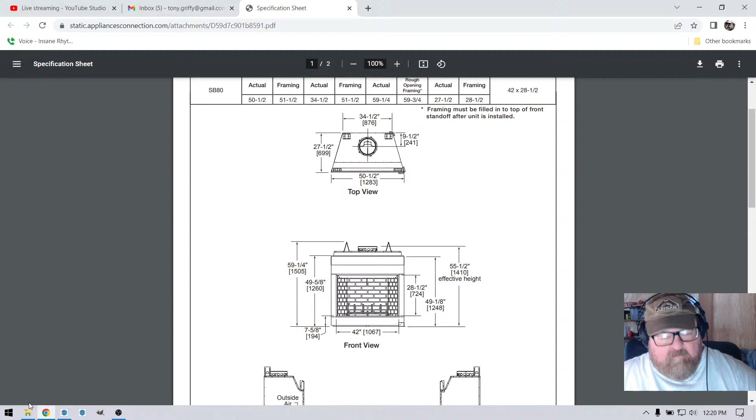I gotta build this fireplace. Actually, we're going to assemble it, but I need to figure out the chimney parts first, the flue pipe parts. This one's not as easy as you might think. I mean, it's pretty simple, but since I was messing around here, I thought I'd show you how I might do this.

I know that we framed this 8 feet out to out. Is that 4.5? So really that'll work.

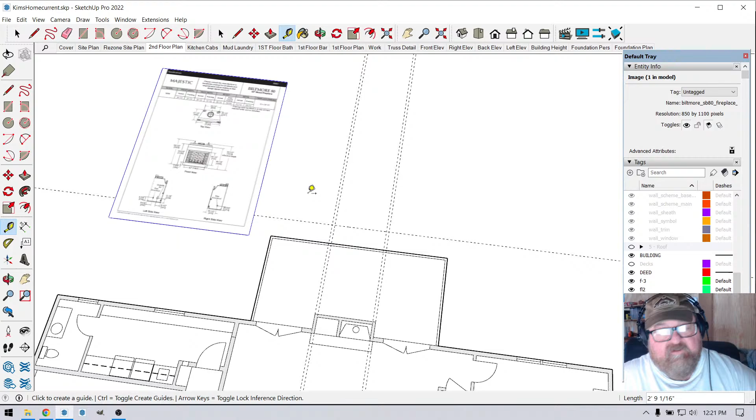So what I thought I'd do is draw this in 2 dimensions first, just up here to start out with. Just draw the floor line across here, and then draw this in 2D first, so if I run out of time, at least I know what parts I need. So I'm going to draw this basic outline here. Now let me get my stud wall in.

I know this wall is 14 feet tall. So I'm just going to draw it like this, kind of diagrammatically for now. And that's 8 feet out to out.

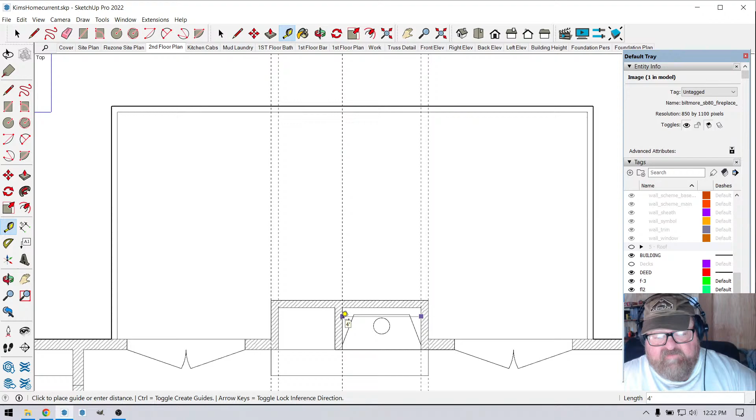So the reason this isn't complicated but the fireplace is actually going to sit straight down here on this side, and then we're going to have a wood box over here. But when I did the floor plan, I was guessing kind of from history. I allowed 4 feet in here, but it's only 42 inches, which is actually more common.

So I'm trying to get my monitor straightened up here. I bumped it. Does that mess up my camera?

Nope, good. Alright, so this wood box, let's just draw the box itself, is 49 5/8 by 50.5. So 49 5/8. What did I do?

I've got my keyboard kind of down here underneath my laptop because I have a bigger monitor. Sometimes I have to reach under and figure things out.

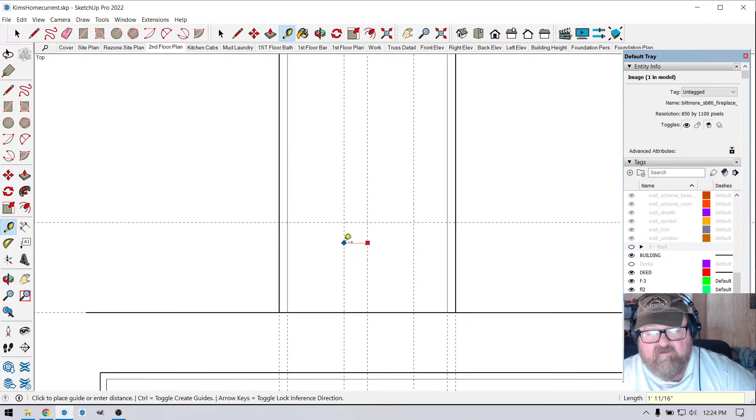So that would be 49 5/8 and then 50.5. So let's just draw this over here for a second. So that would be 25 1/4, 25.25. That's our basic box.

Actually, I want to make this a group because is that going to mess up my? No, good, it copied it. Okay, so just to kind of make it look like a fireplace for now, I know that he told me that...

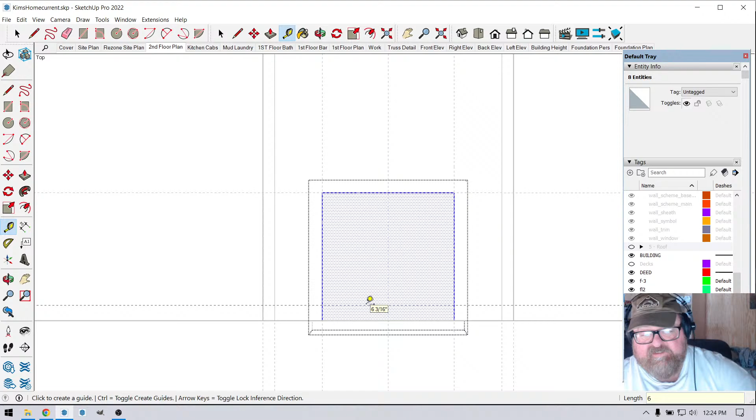It's 6 inches down here. Let me go edit this group. There we go. Just to kind of show the firebox, it's 6 inches, and then it's 28.5. I can see 28.5, and he said it was about 13 inches left over.

That's 15. So that's the part that you can see. 13, she said it was 13. Yeah, that makes sense.

And then there's 4 inches on each side of metal, so the actual viewing area of the firebox is like that. Okay, so that just gives you an idea of that.

And then what we can do is draw this pipe. What I have to do, and this is why I made this a group, is move this fireplace over to this side, and let me get rid of some of these guidelines. So the fireplace has got to go over on this side, and then obviously we'll frame in.

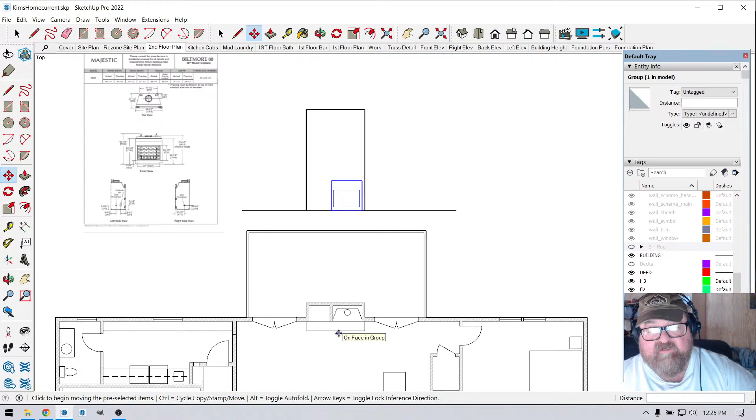But what I need to do is take the chimney out the middle, right? So if I go to the middle of this, I got to get over to there. And it's funny, it's not as much as I thought it was going to be. He gave me all the dimensions of the pipe, so we shall see.

But I want to get this a little accurate, because 55.5 is to the top of that sleeve coming out. I don't like having random pieces sticking out up here. I've seen people who literally miscalculate the height and their cap is sticking way up here. And I've already got this part of the chimney at the 2 foot, 10 foot rule.

So I only have to come up high enough to get the cap on, maybe 6 or 12 inches of pipe, and then the cap. But I don't want to go putting a bunch of pipe sticking up, it's going to look nasty. Besides that, we're going to have a chimney cap that goes over the top of it.

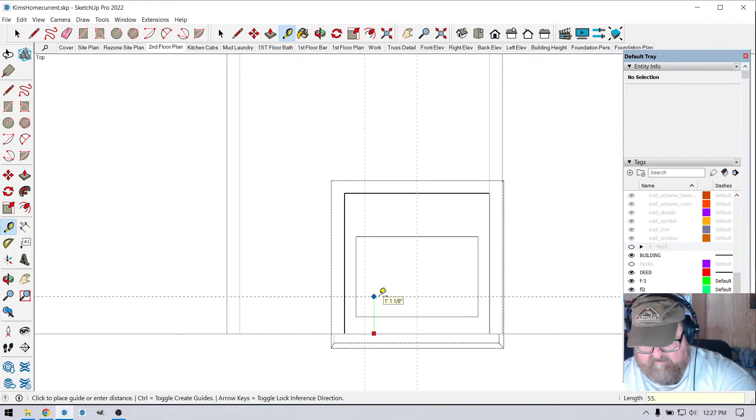So it's 55.5. 5.5. And why does that look weird? 49 5/8. Something that's not right.

59.25. So it has these little ears. These little triangular things are metal, and that's where your header goes. The header of your fireplace will go there.

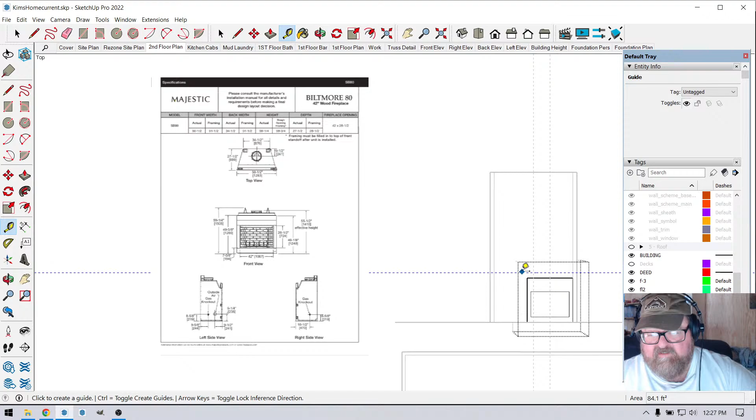And why is that doing that? That's weird. Why is that not snapping to that? The header of your fireplace will go right here, and that's on a different plane. That's weird. Anyway, don't want to get sidetracked here.

And I know that pipe is 13 inches. So if I have a line in the middle and I go 6.5, 6.5, that looks like it's sticking up too far to me, because I've put in a bunch of these, and I think this is just a matter of it doesn't actually stick up that far.

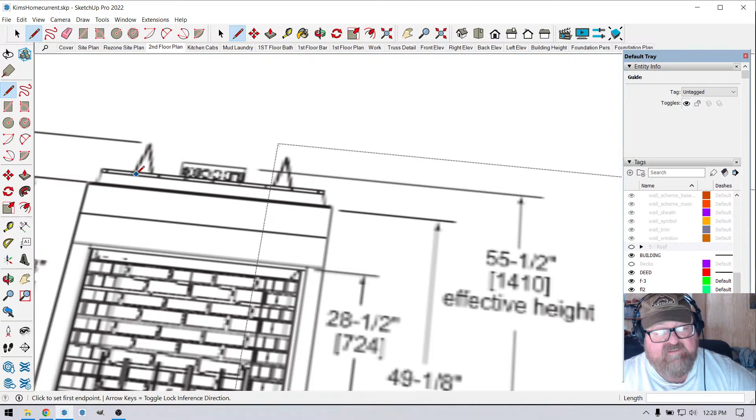There's some other metal that comes up here. See this stuff right here? There's like a guard or something, or a flange around it. This is back though, it's not on the face of this. The only thing that's out on the face is this outer perimeter border, and that's what you see. The rest of it's all behind the wall.

So this is probably sticking up maybe 3 inches. Yeah, so this probably does something like this. Let's just line it up with something. It probably... we'll line it up with that. That'll look good. It probably does something like this.

Something like that, yeah. That's more what I'm used to. I'm used to it sticking up out of there about 3 to 4 inches. Yeah, 2 15/16. I was close.

And so let's get rid of some of these guidelines. Drives me nuts when they get to be too many. Now what we can do is start to figure out our pipe.

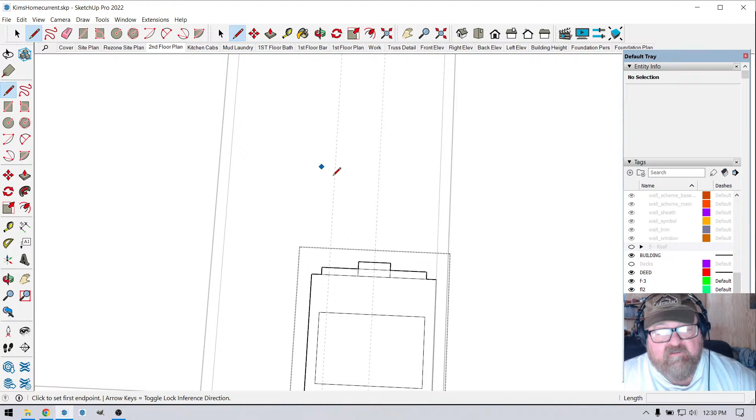Okay, so the pipe comes in 6, 12, 18, 36, and 48. So what I'm going to do is start off thinking I can do a 12-inch piece, because I don't like the 6-inch pieces.

Right, so now I got to do... what I think I'm going to do is do the pipe in their own groups. And the reason I'm going to do that is because I want to be able to draw them. I'm going to draw them three-dimensionally eventually.

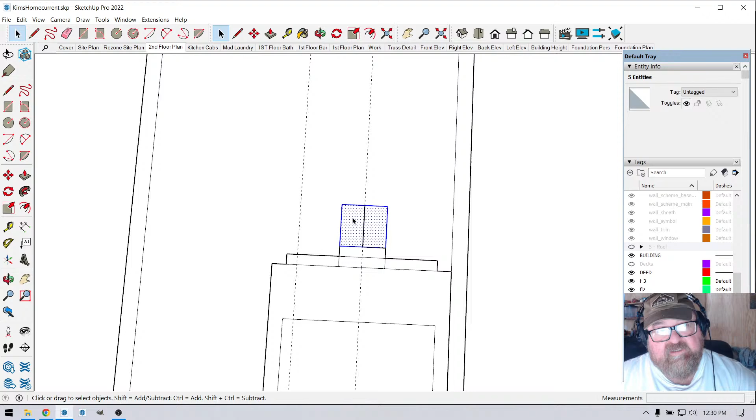So I'm going to make that a group. Okay, so that's its own little pipe. Okay. I should have left it alone.

So now this is the transition piece, or it's 6 3/4. I had them measure this for me. They're like, what's wrong with you, ArtisanTony? 6.75.

Up, and then it goes at 30 degrees. Let's see, got a little compass here, our protractor, 30, and that's got to go to... well, let's see, yeah, then it's 13 inches. Is it 13 inches? Yeah, 13 inches this way.

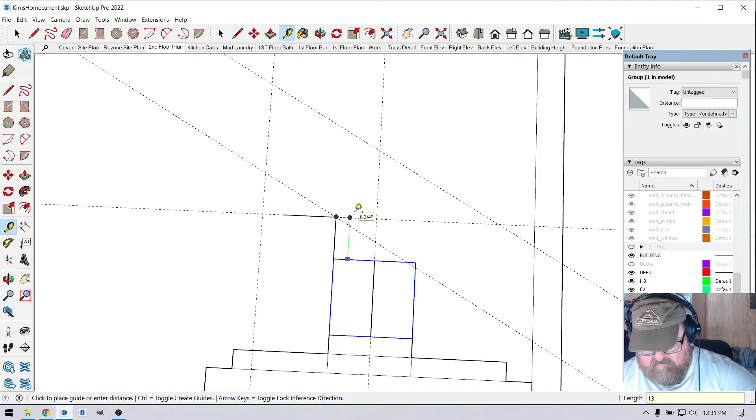And then she said it was overall 13 3/4. Which doesn't... oh well, okay, so if that was the overall height...

I don't know. I'm just going to draw it like this for now. And is that 13 inches? That's 13, and this is 13.

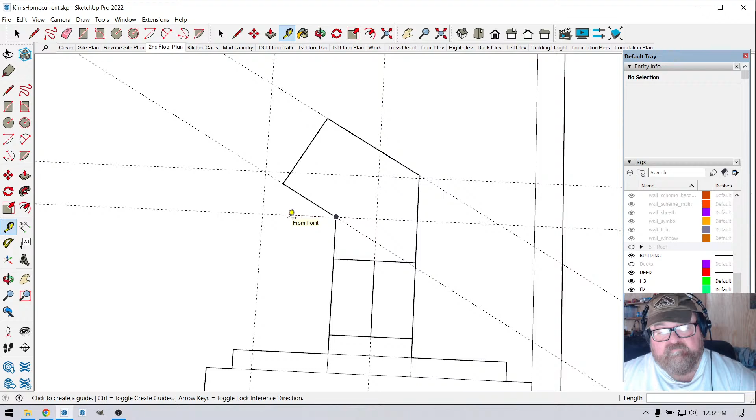I don't know how this can be 6 3/4 and then this only be 13 inches overall. This is why I was asking them.

Well, I guess what it means is technically this part would have to come all the way back. See, that doesn't make any sense. Doesn't make any sense.

I mean, even if it was right there, I don't think she knew what I was asking her when I was asking her what's the overall height. I'm getting like 18 inches. If this is 6 3/4...

So, oops, I messed that up, didn't I? I don't think it... I think it's going to be more like, from what I remember, just from installing these things, this is more like that.

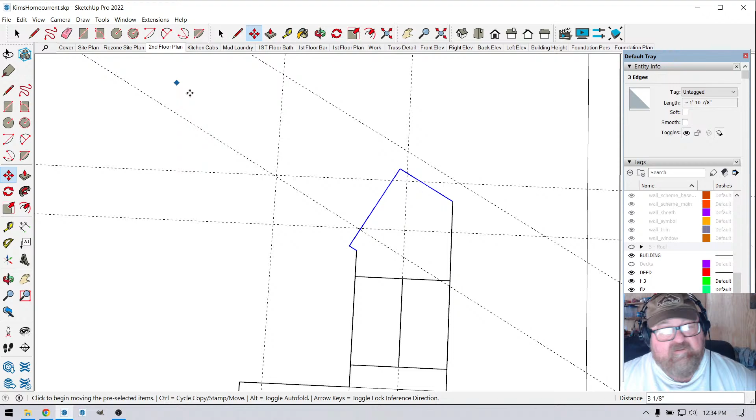Well, let's see. It's like, it would be whatever would make these two legs the same. So if I ran this out... oops. Oops.

I'm going to leave off that leg for now, because this has to be 13, and then this is whatever. Oh, this one. So what I'm thinking is it's like half and half.

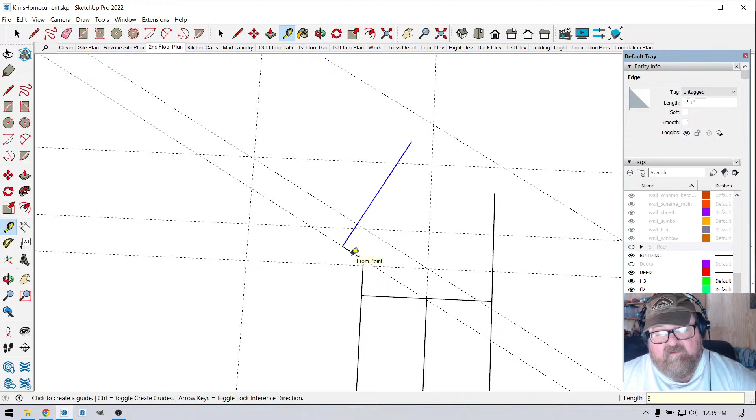Like if I made this 3, if I made this 3, and then I made this 3, then this should be down here.

Let me get rid of some of these guidelines because I'm getting a little whacked out here. That's still 15.5 inches. And then if I made this 2...

See, so what's the height difference? I know what to do. Now I'll measure the difference between here and there. So 1 inch, so 2.5.

So if I move this up, does that work that way? If I move this up to a half, it doesn't exactly work that way, no. Because this is at an angle, so you can't just go raising it up.

What was this? Yeah. What is this? 2.5. This is 2.5.

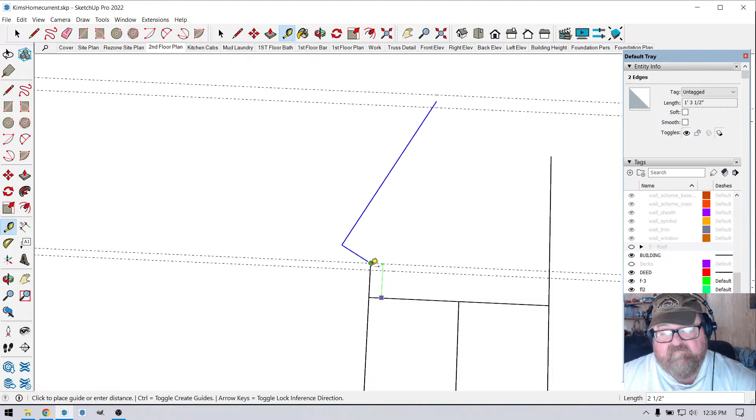2.25. I'm not sure I'm trusting this. I don't mean to be mean to her, but I don't think I'm trusting this because... see, I gotta go down. I gotta go like to 2 1/8. But see, then this would be 2 1/8.

Oops. Well, it would go from here to there. That's pretty close. I'm still not convinced.

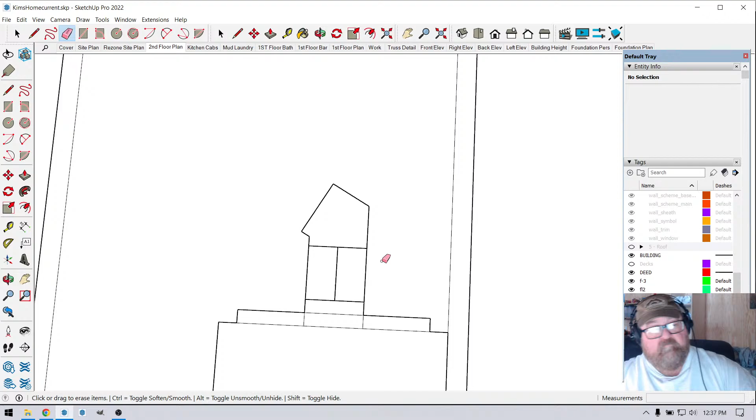Oops, I thought that line was by itself. Don't really need that. Let's see if anybody's watching. Hey Richard, how's it going?

Let me call this guy. And I realize this is a cylinder, but still, it should work out.

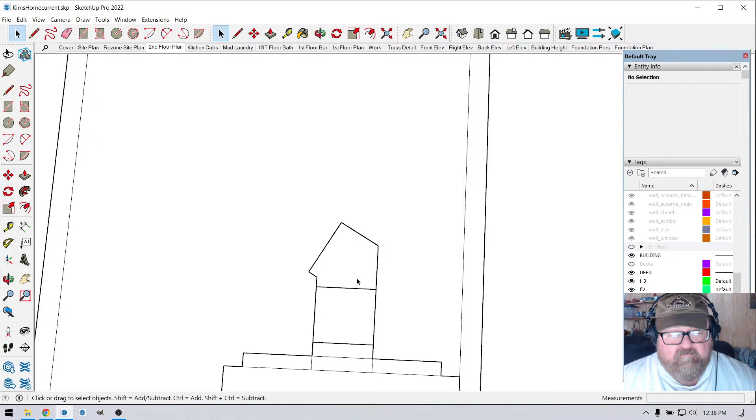Hey, it's Tony again. I just had one more question about these elbows. I'm not sure what she was measuring, 6 3/4 on that, but for some reason, are they? That's one elbow at a time, not both of them hooked together, to give you the breakover portion of it.

I was just asking, I'm trying to draw one elbow as a part. Right, and that's what she was measuring, one elbow. Well, if you raise that leg up 6, what was it, 6 3/4, and then you go 30 degrees, you go 13 inches.

It's much taller than what she said, 13 3/4. It's taller than 13 3/4 if you go up. If you go up 6 3/4 and then you go 30 degrees with 13-inch pipe, then it's taller than that.

Hang on. How she measured it is one elbow on the floor, and the high part of it she measured, and then the low part she gave you the second time. That's one elbow sitting on the floor before they're hooked together.

Right, and I'm just talking about one elbow. Let's forget about two elbows right now. Right, right, one elbow. The absolute height of it, if it's sitting on the floor, was 13.5 inches.

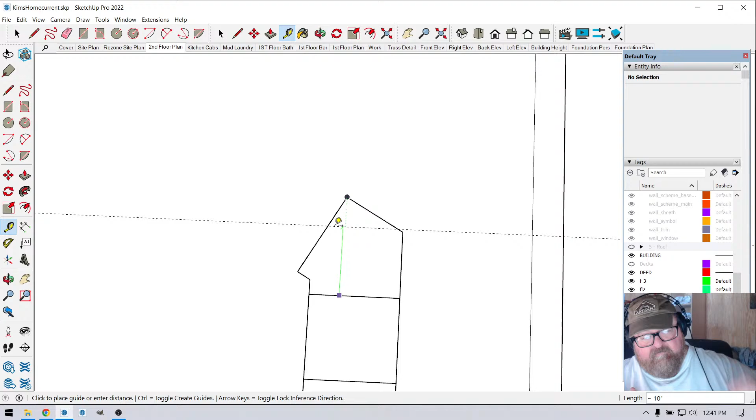No, see, that's not what I'm talking about. I'm talking about the actual height of the entire assembly of the elbow. But one elbow, yeah, I don't guess you can.

Can you text me a picture of what you're talking about? Yeah, because part of this is I'm trying to get these accurate in my CAD system so I can use them in the future, and I don't have to bug you by calling you like this, right?

See, so she's going to take a picture of it out here on the floor. Or I'm going to take a picture of it, one of us will, because I don't... If you just laid 13-inch pipe on the floor, it would be 13 inches tall. I don't see how an elbow has to be taller than that.

Well, she's going to take a picture of it. I don't want to walk away with the phone. You won't be able to hear me. She's going to measure. She's going to measure the two.

I mean, if the elbow's 13 inches tall, the little legs can only be like 2 inches or something, you know. Hang on a minute, hold on, let me get your phone over here so she can.

I'm going to put a tape on it as she takes the picture, okay? Okay, I'm going to walk away from our phone. My phone's on speaker, my office phone's on speaker, so. Okay.

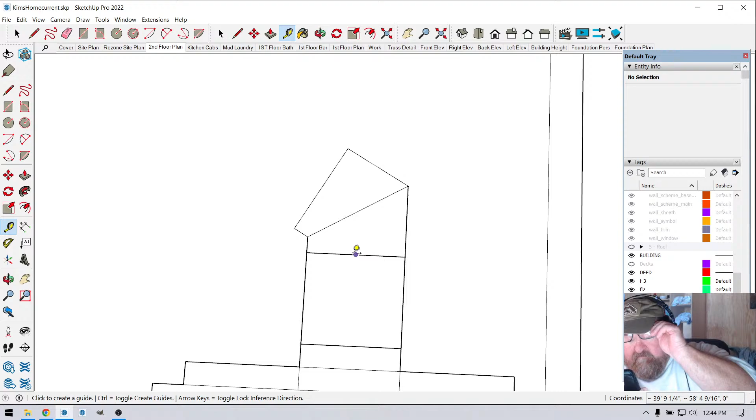That's how they're 30, these are 30 degree. Now this is different than my triple wall pipe because the elbows are different on that, but that's how these are. I must be remembering the other elbows you're talking about because I don't remember these. Look at the way they got the crimp in them.

Right, so they don't take pipe and cut it and slice it at 30-degree angles and put them back together like an elbow. It's like it's bent almost. Yeah, that's how this manufacturer does it.

All right, so I know what to do now. Okay, all right, thank you. Yep, all right, bye.

It's weird, I'll see if I can show it in the camera. That's different from the ones we've used in the past. So that's part of the problem, and I knew something was weird about it.

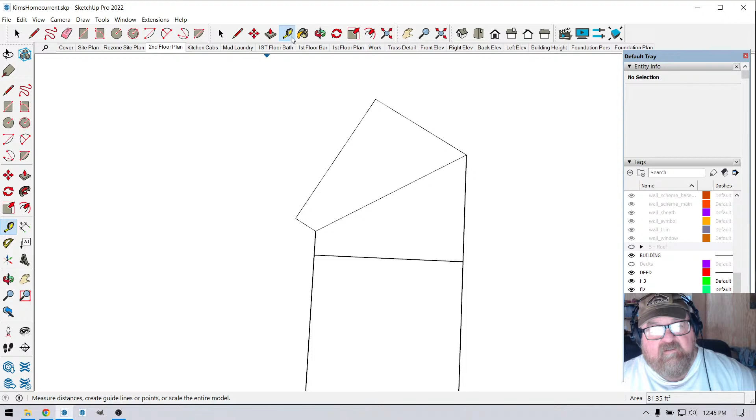So that means if I had a center line, let's get it straightened up here. Let me get rid of this. Since this is not correct, let's just get rid of all this, because what it's going to be is it's going to be this.

But in my defense, that isn't 6 inches. She's talking about when she's talking about 6 3/4. That was the height of this.

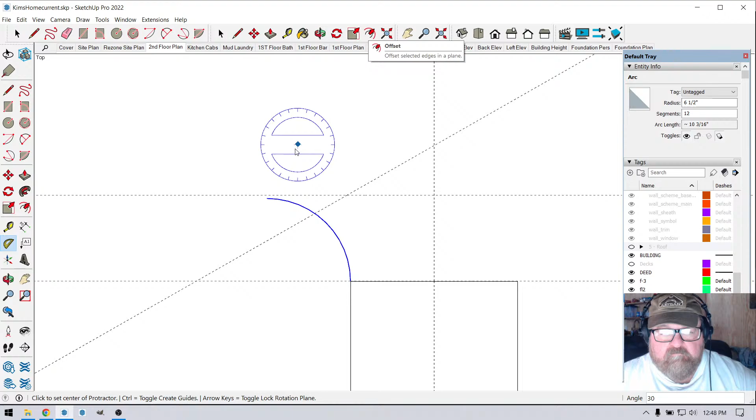Somehow I gotta get this in close so I can offset. Let's see, can I offset this? Yeah.

Like that. So once she's...

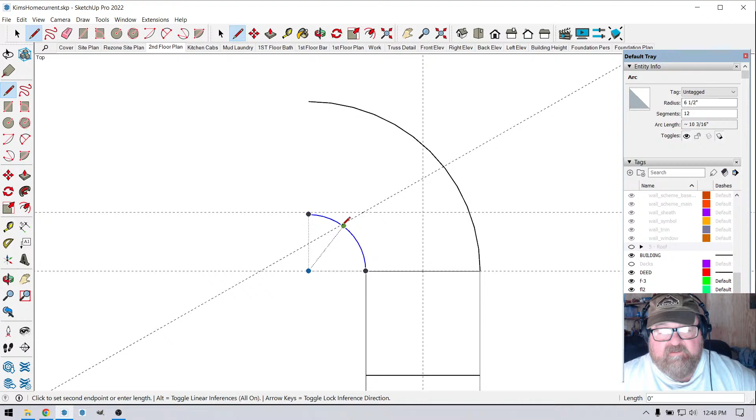I mean, what it looks like in the pictures, it does something like this. Oh man, what is that doing now? Why is that doing that?

Okay, it is coplanar. I mean, it looks something like that, but that's weird looking. It's not, that's weird looking. This looks natural, but this thing, oh, she said it's 13 3/4.

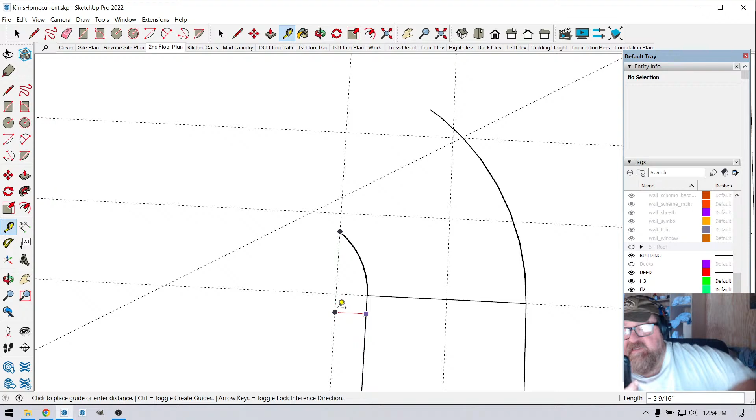I still think it's weird. I still think they look like they're flatter than 30. It's weird, especially the one on the right looks like it's flatter than 30 degrees. But I trust you.

That doesn't really matter so much as the offset.

You don't want any piece in between it. Really, all you have to do is take a measuring tape and butt it into the bottom and see how far it hangs over. That's what I'm saying. Okay, now give me another tape measure to see that. Because, in effect, that's adding to the length of the pipe I put in between them. You're going to pipe out.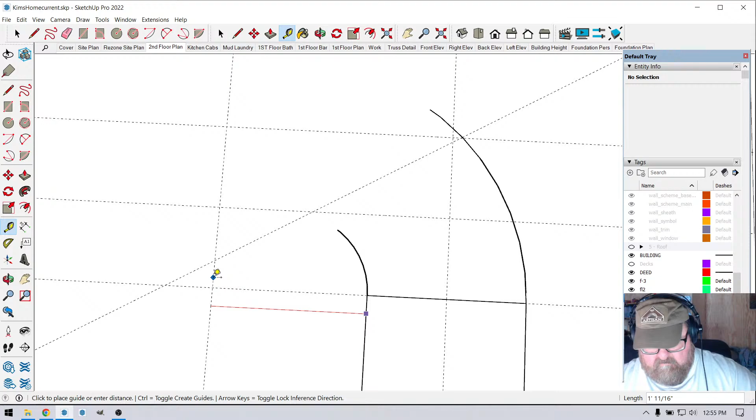Well, if you cut straight down, it's like 4.5 inches right from the pipe. She's gonna take a picture of it. Yeah, I didn't think it was 6.

Every goddamn phone sucks. Trust me, it won't work.

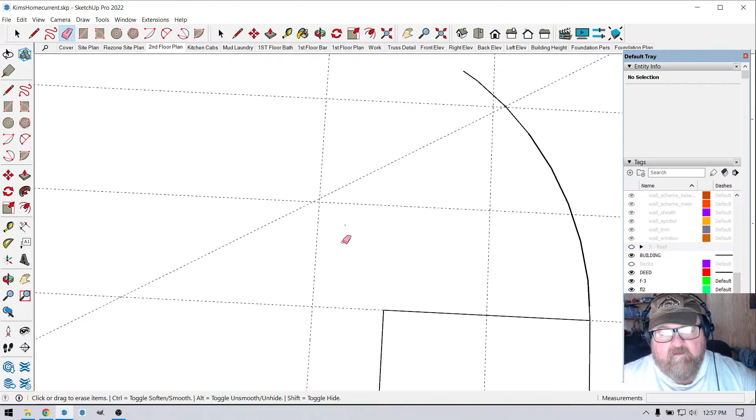Yeah, you should have it. In a second, something doesn't... Was that the number you want? I mean, is that how you want it? Like that? Yeah, is that what you were asking about? Is that what you mean? That's what you're talking about? Yeah, I mean, that's it, but I just don't... It doesn't make sense in the drawing, so I guess I'm just going to have to kind of give up on it.

But didn't you say that point was also 6 3/4 off the ground? Yeah, let me take the top off in a second. It comes out to be 7. It's just weird looking in the drawing. It's like 6 3/4. Yeah, 6 3/4.

Now, like I said, those two caps, those two pipes weren't snapped into one another. And you got about an inch there when you snap them together. Well, yeah, I mean, if I can get it within an inch, I'll be doing good.

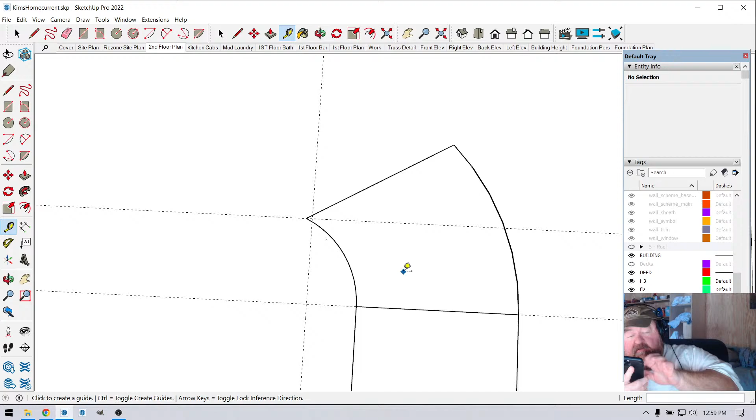It just looks... if you could see my drawing, you'd agree with me, it looks weird. But I guess I think what it is, there's a... I'm just not drawing the little rim around it. So, all right, well, I think I've probably spent too much time on that anyway. I should be able to get it close enough now. All right, thank you. Let me know later today what pipe you need so I can get it all together. Okay, all right. Thank you. All right. Bye.

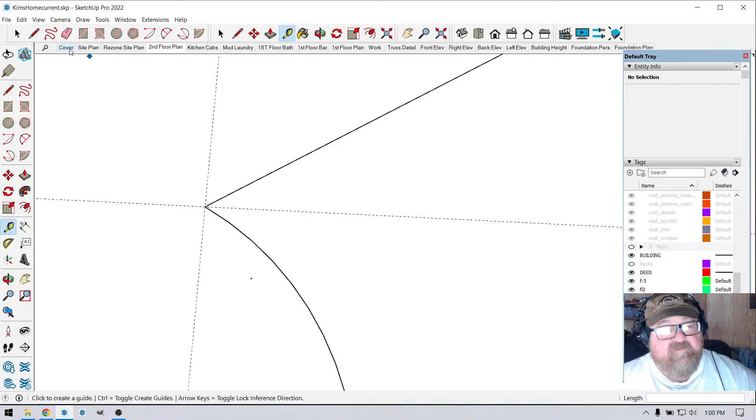It's just frustrating to me that you can't just draw a simple radius in this. Because, based on their dimensions, this is supposed to be right there, and then this is supposed to be at 13.75, which is close. So I don't know, I just don't trust that little... It's almost like there's supposed to be a little hook here at a 90-degree angle, like that, and it comes down an inch, because those pipes slide together. So if it comes down 1, and then does this radius.

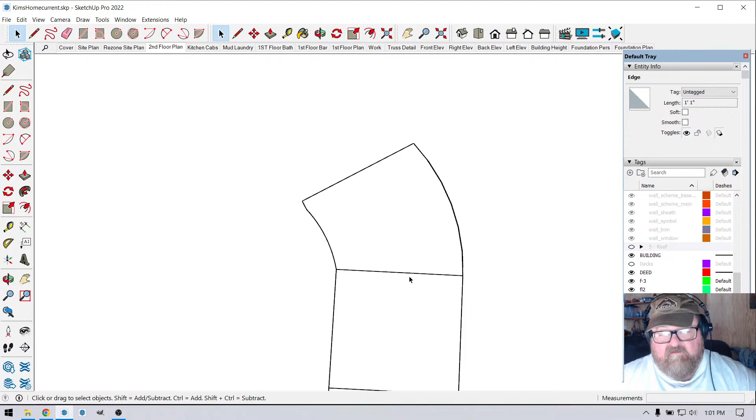Yeah, I don't know, it's weird. The main thing is I need this offset. So now if I make this, I gotta have a line across here, because now I can make this. I drew a line there, and that didn't want to cooperate because this is a block — I mean, it's a group. So I need a line across here, and I don't know why that wasn't cooperating.

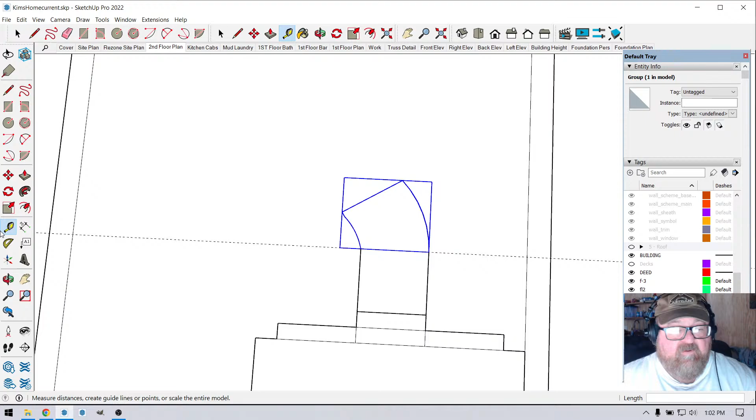Well, it has to be — it's got 2x6 walls, right? So it's got to be R19. Yes, correct, just wasn't sure if maybe you wanted any sound walls or anything like that. You just want the basic exterior walls. Yeah, okay. We are going to need some blocking around the fireplace. Right, so that's the only thing extra I can think of.

Okay, all right, well I'll get you put down. I'll probably just swing by there about 9 o'clock in the morning, get something together and maybe get it sent over to you that evening. Okay, thanks a lot. Yes sir, thank you. All right, you too, thanks, bye.

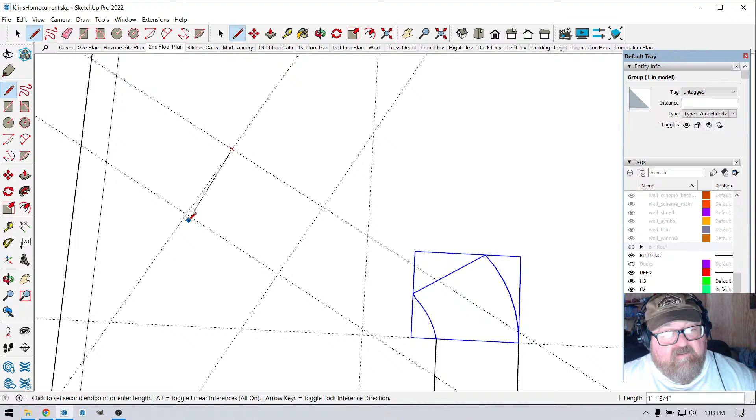You can see why I'm skeptical about this whole thing, because I'm going to document this when I actually put this together. Something about the 30-degree thing isn't making any sense. I'm going to guess I need an 18-inch. So I'm just going to draw it. I promise you, I think it's more like 22 and a half. 22 and a half would be half of 45.

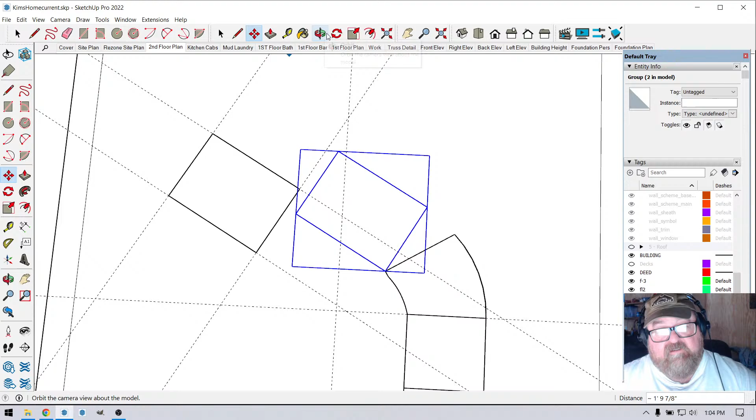Yeah, see, I don't get it. Because this is... that's 30 degrees. We'll copy this over here. And I'll show you why I don't get it. This is why I don't get it. I mean, the measurements don't even make it look like a real elbow or whatever.

So then if I had this going back the other way, does that even get it? This will be the true test right here. If it doesn't make it go back vertical, then I'll know they're lying to me. Watch it be horizontal here. Well, it makes sense because... well, I don't believe I got lucky. Look at that.

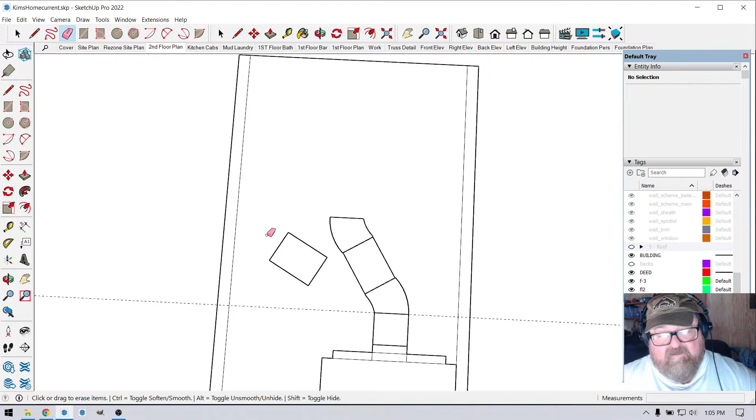Alright, so what it is this, it's the shapes that are not, there's probably no way to get the shape exactly right. This is not right. That's 13. Yeah, this should be...

Let's take this and get rid of that. This should be, let's just draw our own radius. So I can eyeball it better than this compass can do the radius. Not really, but I think my radius looks better, looks more real.

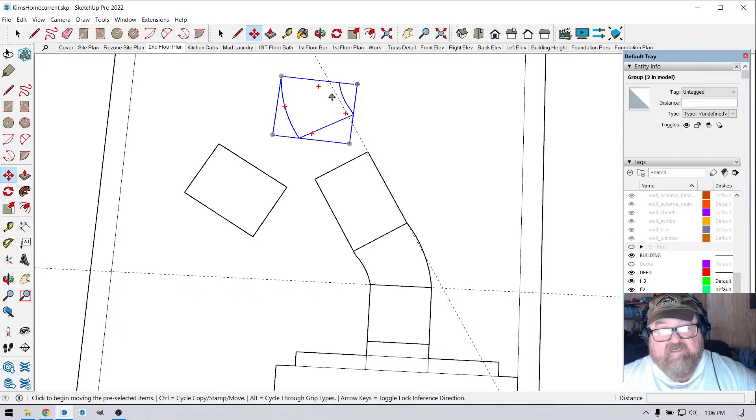So I'm gonna get rid of this one and copy this one because I like mine better. I'm just kind of eyeballing it, and then I'll fix it whenever I get it there, because I know this is 90 degrees, so I know that has to work.

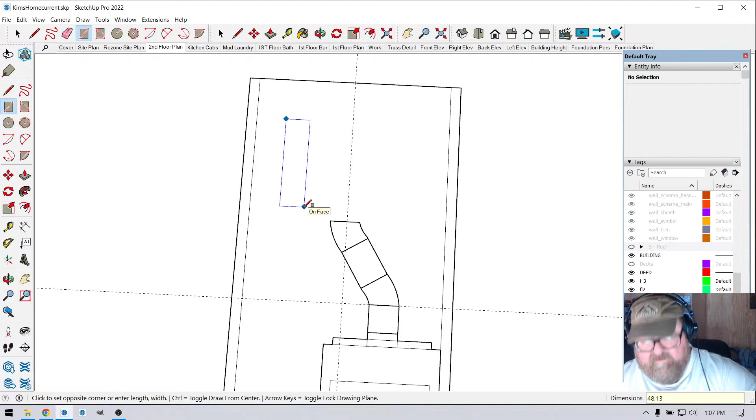Now, what's funny about this is, I mean, it literally is going to work out if I just use that 18-inch piece that I see on the list here. Now I've got 3 footers. Oh, I got 4 footers. Let's do a 4-footer. 48 by 13. I'll just make that a pipe.

I'm not straight up and down, am I? Let's make that a group first. Now, this is the whole point right here. So the whole point of this was trying to get these offsets, because each time you enter in these 30-degree angles, they push it this way, and then you got the length of this pipe that pushes it that way.

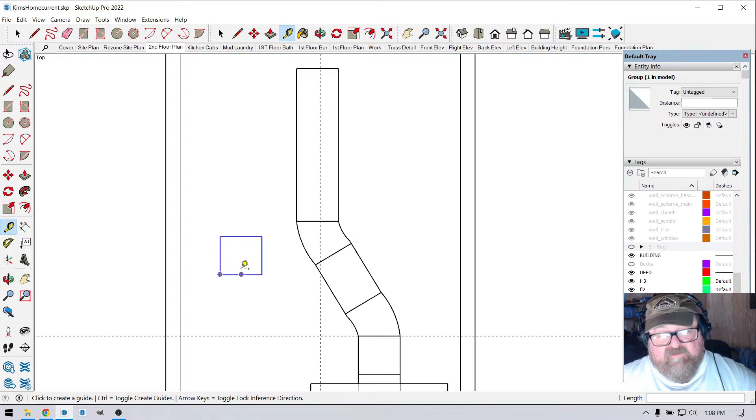So it just turns out that 18 inches is probably going to be close enough, because if I went to 12, let's just make this a 12-inch piece and see how that does. 12 by 13. That's going to be not far enough. So I think this is acceptable. That's only an inch off the center, so I know the 12 inch is going to make it worse than that. I can tell just by feeling it.

So if I move this and this down here, see, that's more than an inch off the center. Okay, so we're not going to worry about that piece. We might need this piece at the top though.

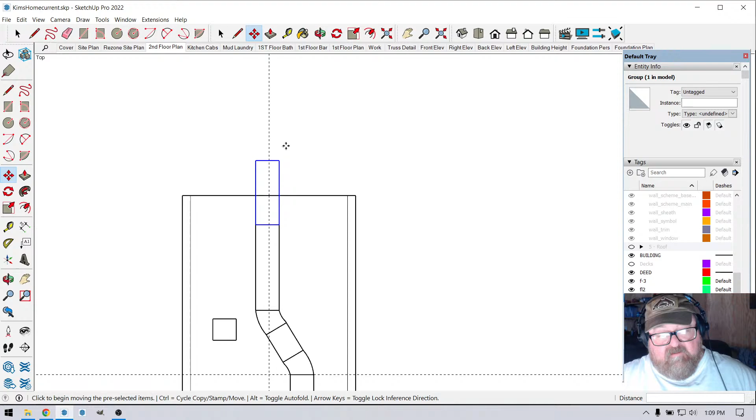This is easy to do, so I'm just going to make me another 18-inch piece. I'm looking over here to see which direction, so 18 by 13. Which number? Sometimes it acts funny and it wants you to put the vertical dimension in second. Yeah, see, that's not going to... Well, I could do an 18. Let's see, I know what to do.

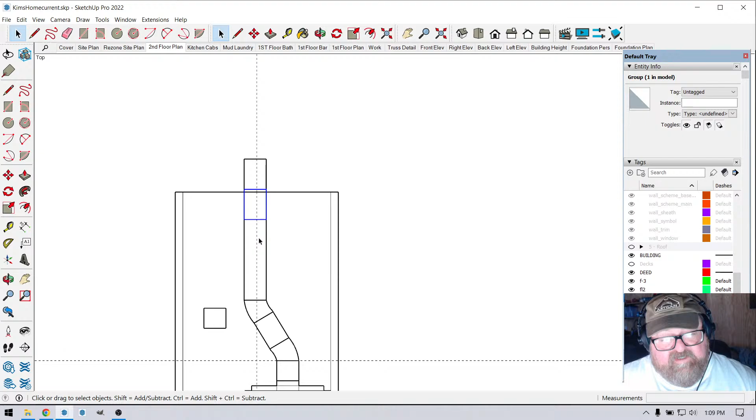Well, 36 doesn't do me any good here. That's 48. What I could do, they have a 6-inch piece. Or they have a, what was this? That was the 18, wasn't it? Yeah, that was the 18. And I could put a 12-inch on top of this. Yeah, I could make myself a 12-incher here.

The Space Store, Valentine's Day. Oh, I ordered some patches from the Space Store one time.

The Space Store. 18 by, is this the, which is the narrow? Okay, so 8. What did I say? 12 by 13. So if I put this up there, make group. Yeah, that helps me, because see, I still got to put a cap on top.

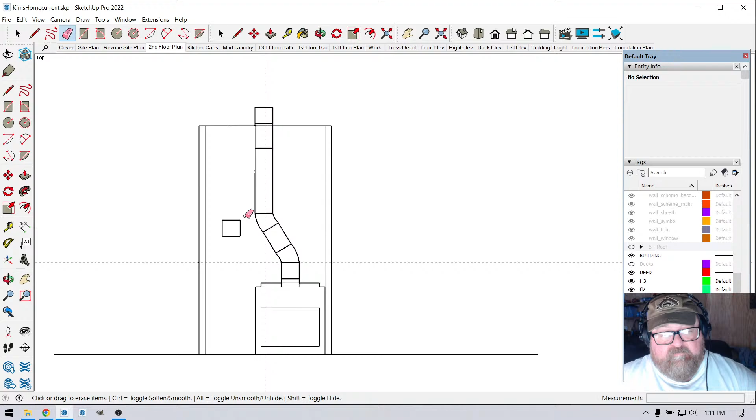So this was an 18. That's a 12. This is the 30. That's a 48. I was saying it said 4'2" or something. That was weird. And then you'll have the cap sticking out.

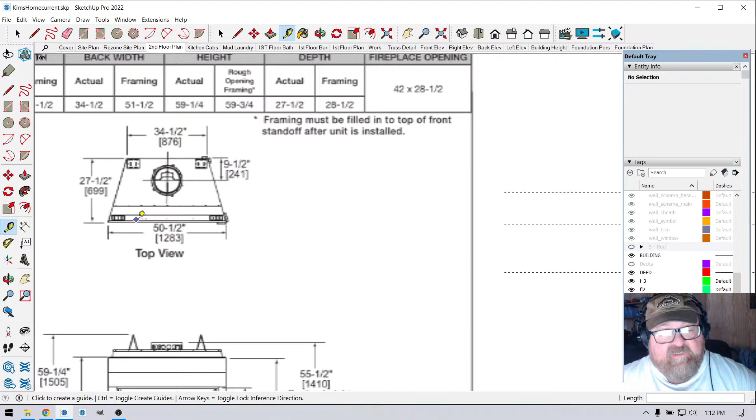So that's it. That took longer than I thought, so I'm not going to draw it in 3 dimensions, I'll do that later because I have a meeting at 1:30. But this is like the cut sheet, that's the plan view of it, and we got her figured out. I know that was probably painful to watch, but I just thought I'd turn it on and stream it.

So let's see if we have any other. Oh look, you all came in at the last second.

My guess is 6 inches. What's going to keep the little green men from coming? Oh Daniel, you always got to be a smarty pants, don't you? Well, shotguns maybe, that'll keep them from coming down. I'm worried for the fat man at Christmas, getting stuck in the pipe. Well, the old flue pipes weren't any bigger, that's what was always funny. I remember when I was a teenager starting in construction, I've been in construction for 45 years. Back in the day we had masonry chimneys that we worked on, and I always thought, how did Santa Claus ever get down? I didn't really think that because my parents, we were brought up in the Southern Baptist Church, so I was never taught that Santa Claus was real. But I always thought to myself, boy, nobody could get down that chimney, not even the skinniest person I knew.

Well, if I just go back to the second floor plan here, I can get a cap pretty easy. If I go to, I'll show you the one that's really close to what we put on. It's like this one's pretty close. That's in 3 dimensions, and this is in 2 right now.

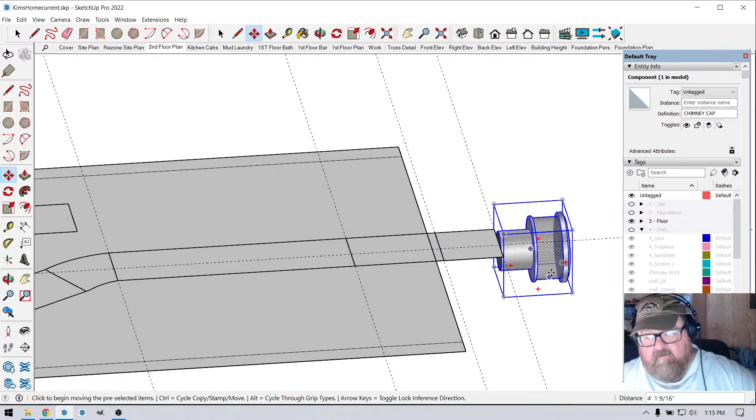But they make them big enough, obviously, they make them bigger.

So anyway, I'm just playing around. It's also taller, this part's also a little taller. But anyway, that's why I didn't want this sticking out of the roof a lot, I mean out of the chimney box a lot, because this piece has got some height to it. I was going to actually call him, but I've already called him 3 times today, and now I'm embarrassed to call him again.

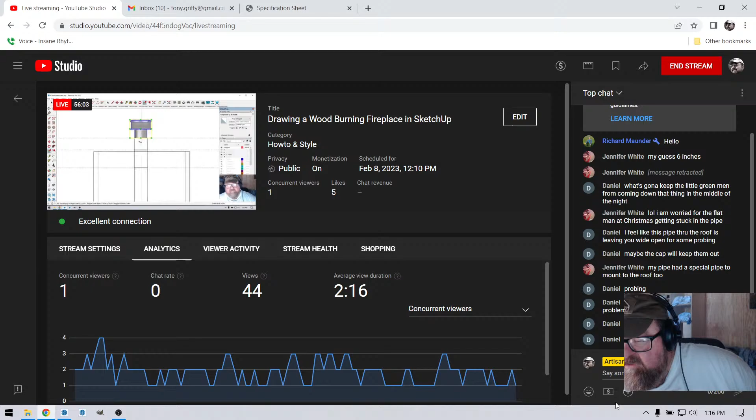But my pipe had special pipe to mount to the roof too. They don't really mount to the roof, they go through the roof, and we actually have metal plates with a hole in it that keeps it separated. You have to have a 1-inch airspace or separation from all the wood, an inch all the way around, so it ends up being a 2-inch bigger hole than the pipe size. But there's a metal shield that goes down up against any kind of wood, and that's what I was just talking to the insulation guy about, fire blocking.

What you have to do is between the floors, if I turn on... I don't have the wood framing drawn in this house, but this floor down here goes all the way down to the first floor, so we have to have fire blocking between this floor, and then we have to have it where the roof goes through, about where the wall comes up to 9'1". So right where the ceiling is, here you have to fire block it again, and then where it goes through the roof. Inspectors are pretty picky about that, but I get my insulation guys to do it.

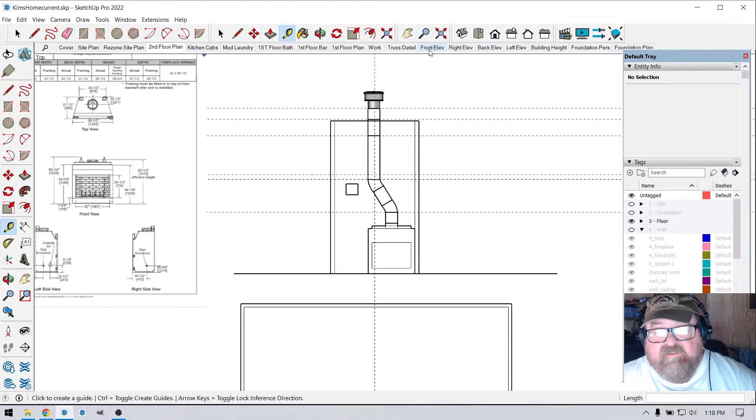The ventless goes downstairs, so we got this. If I go back to the front elevation, and I can torque the house around, so this fireplace goes all the way down. So on this level down here it's got a gas ventless, and then on this level up here is the wood burning. And she changed that, so that's why I was having to...

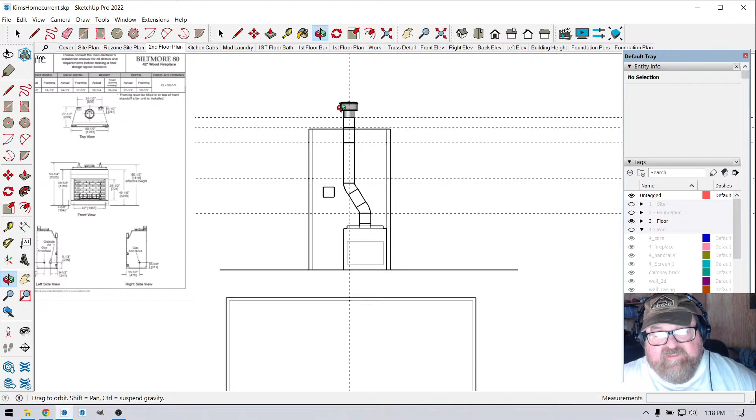That's why, before, this one was just going to go straight up, right? And then the one downstairs was going to go straight up on this side. So we were going to have two chimney caps, 2 chimney pipes and caps. And then I was going to do that fancy overall cover thing, just to make it look more modern.

But now that we only have one flue pipe coming through, I wanted it to be in the middle, and that's why I was trying to figure out these transitions, because these chimney pipes only come in fixed lengths, so you can't just go willy-nilly buying pipe. You got to figure out this piece right here is the most important one. And that's why I was trying to figure out the offset of these elbows, because the offset of the elbows makes it go that way, and then the length of this pipe makes it go that way. And you can see I kind of got lucky where it's pretty close to the middle.

The manufacturer will have installation instructions with the fireplace. I've installed a thousand of these things, man. I know how to install them.

They're pretty simple. Don't let somebody tell you it's hard, because it's not. All you're doing is taking the fireplace, and it's got double wall chimney pipe. I can't see my keyboard, I'm just guessing. There we go. Images, you see, this is it right here. You see how it's double wall? Looks like triple wall. Is that double wall? It's stainless steel pipe.

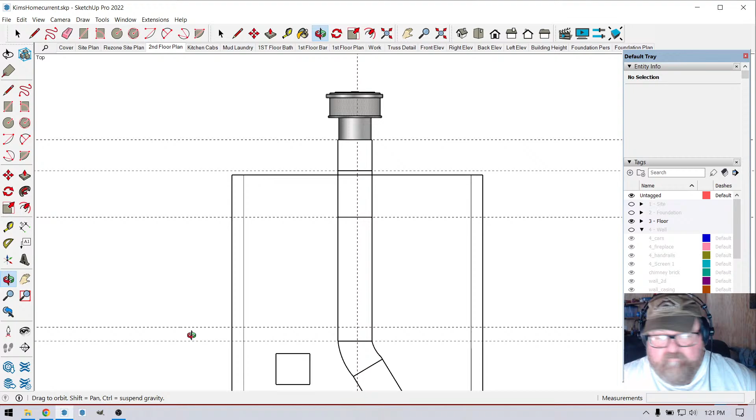But it's easy to put, actually pretty easy to install. It's not difficult. The guys who do this, I mean, every house I've ever built, we've done our own. We install the fireplaces. I've never hired anybody to install them for us.

I'm surprised they let you have bends like that, looks like it would catch soot. No, it does. Even if it caught soot, the arrestor - the cap has that wire screen. It's called an arrestor, and it puts the soot in jail.

But there's the elbows, where's my... there's the elbows I was trying to draw, but the dimensions they were giving me didn't make sense at first, because it takes a little skill to take dimensions on something like that.

Any other comments or questions?

Yeah, I mean, the thing is, once you've installed one of these fireplaces, you realize how easy it is. Honestly, the fire blocking is the most difficult thing, and keeping all your clearances, all that. The actual installation is easy. If people knew how easy it was, they'd do it themselves. It's nothing, you're just literally taking a pipe and sticking it on top and twisting it.

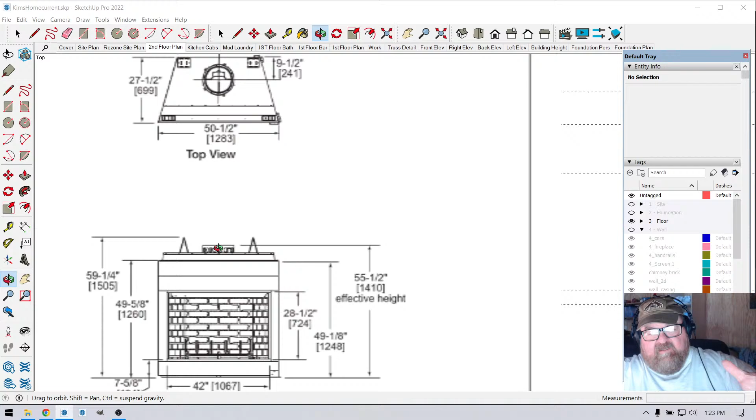But you see that little rim right there is the little snappy rim, and you literally just take the pipe and stick it on there, get it down, and twist it, and it locks in. It is a little trouble because you have to hold up the outer piece and reach in and grab the inner piece and get it locked in first, then slide the outside piece down and twist it. So it's not that easy, but mentally, the mental faculty part of it is easy. It doesn't take a rocket scientist to put one in.

The main thing is you have to know the code while you're framing it. So while we were framing the house, I had to have clearances around the box and around the chimney and all this kind of stuff.

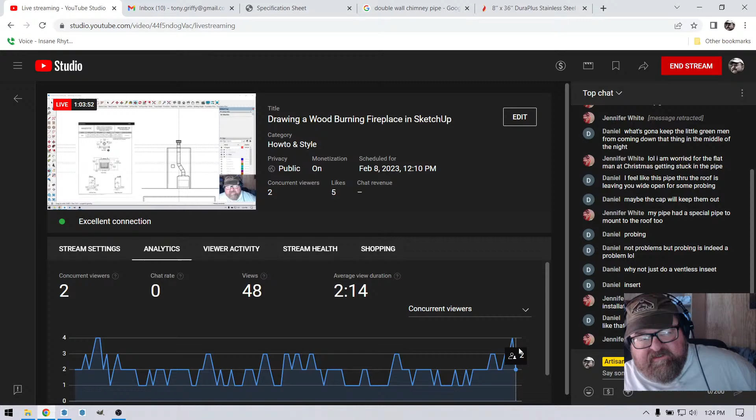But I was gonna see, I really want - I'll take this time, I got a little time. What I was gonna do was draw these. I was gonna go like 6.5, probably wouldn't be that hard now, and draw 36, then come in like a 16th of an inch, and come back down. Let's give this in perspective, it looks better. Yeah, and then I was gonna make that a group.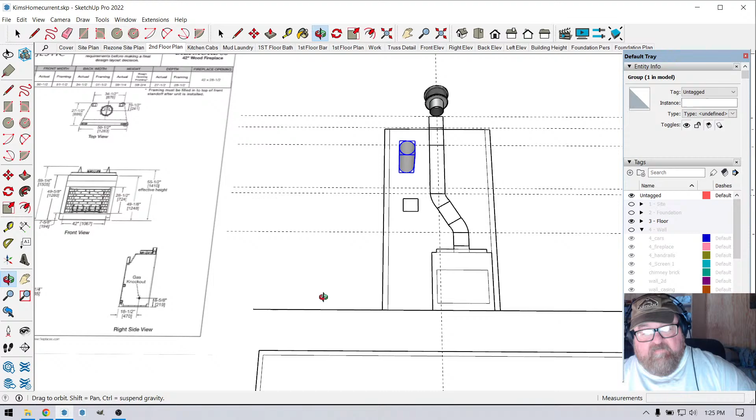And then I was gonna actually build this thing. Then I was gonna take and draw 50.5 by 27.5 - what am I doing - 50.5 by 27.5, and then it comes in, I think they come in about 34, there it is, 34.5. So 17, oops, where is this? 17.25. Well, I come here and then I go 17.5. Wait a minute, what was it?

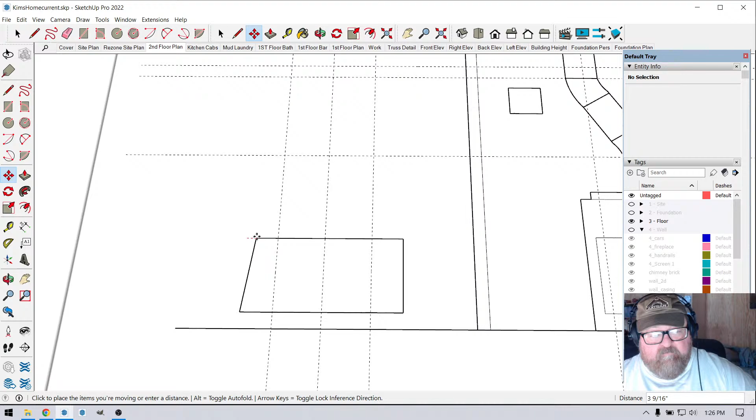17.25. Now I should have deleted the other one first. Gonna zoom in now. So see, then this point goes there, and that point goes there, and then this comes up.

Now I can use my, let's see, what was it? I want to draw this 49 5/8. Wish people would quit texting me while I'm trying to do a YouTube. And then this thing, I remember most of the stuff.

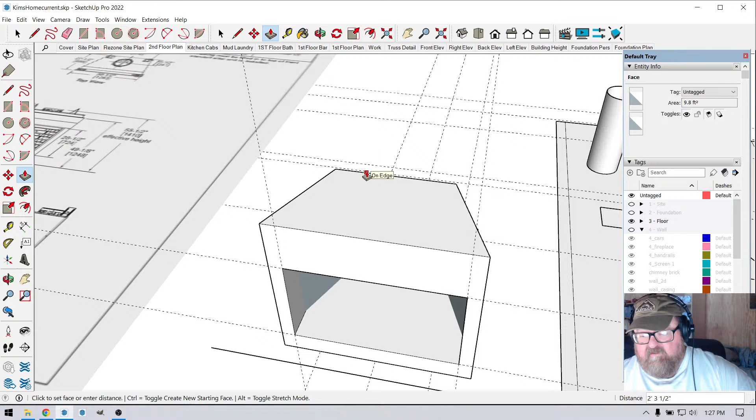This was 6 inches. This was 4, 28.5. That's the actual firebox. And then it goes in to within a couple of inches of the back. So if that's it, it'd be like 24, like that.

And then oh wait, actually I remember that, yeah, the last time I drew one of these I took this out and then I just brought this back in. Wait, make that additive 2, and then I just... yeah, anyway, you get the idea.

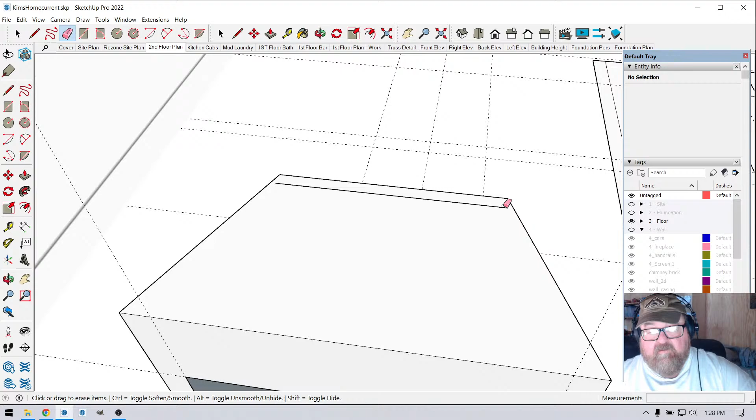And did I lose the bottom? No, I didn't lose the bottom. So that would be kind of the thing, and then get rid of these things. That's going to get rid of that though, isn't it? I'm not going to worry about the back right now.

So then you come in 9.5, and you go to the middle. Where's me a vertical line? Yeah, like that, and then you got your 13 inches. 6.5. And I think, pretty sure this comes up 6 inches. What was it?

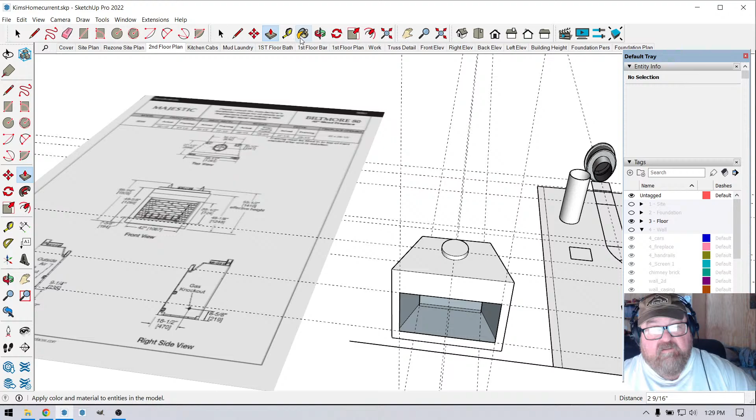I have to call him back. He's my customer out in Phoenix.

That's 55.5. So if I just come here, what was this? 55.5. Then I can bring this up like that, and then that also can come in like a 16th. And then go in to here. And that's kind of that.

So I got 30 minutes, but I need to get ready for this other meeting. What I was going to do is make this a group, and then I was going to set this over here. I was actually going to do this.

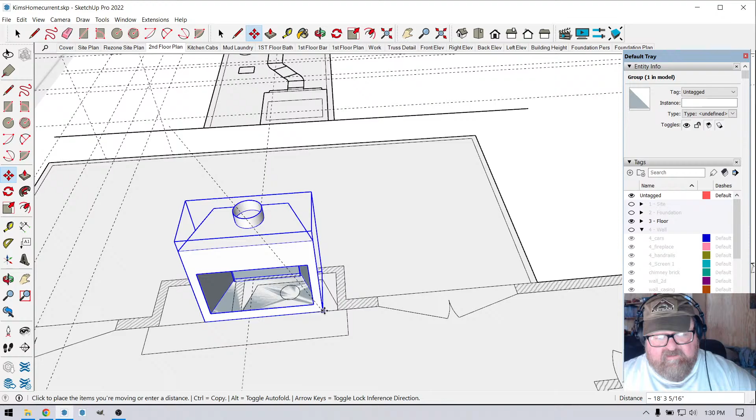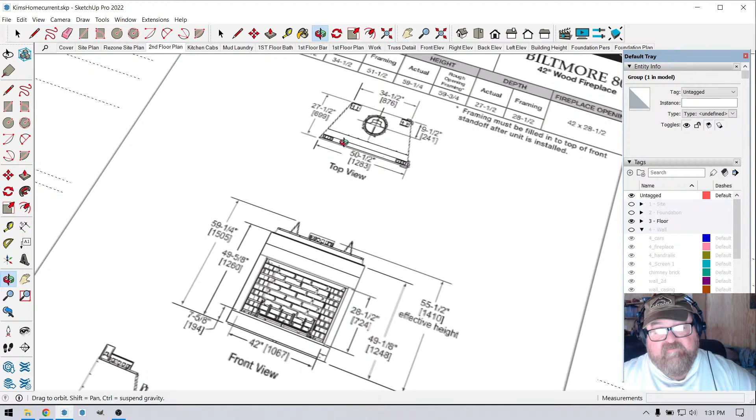Yeah, see, the firebox is going to have to be, and that's the other thing I told her when she wanted this fireplace, was that it's deeper than most fireplaces. Most of them are, I think, you got to be an inch off the wall. Most fireplaces will fit in a 24-inch cantilever. So we framed this 24 inches deep, and this fireplace is like 27, what was it? Wrong picture. 27 and a half, and most you can get them that are 24 inches, or that will fit in they're like 22 and a half or something. So this is, it's pretty big fireplace.

You can see how much bigger it is. Yeah, you see, some fireplaces 42 is the actual. Wait a minute, something's weird here. 50 and a half. Oh, brother. Yeah, that's not right. See, talking on the phone messes you up.

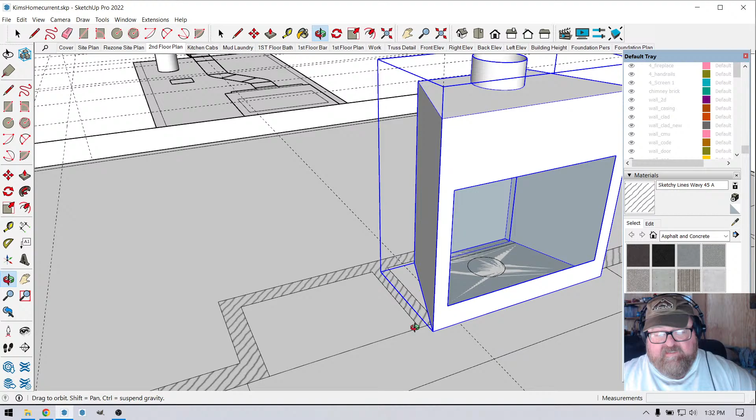That's more like it. That's closer to the original size that I had. Anyway, what I was going to do was, I was going to draw all these pipes and stick them and do it 3D, but now I've run out of time. But I had to do it in 2 dimensions first because I had to figure out what the offset this way was going to be. So I had to do it in 2 dimensions. And then I was going to take all these parts, because in the future I want to have all these parts drawn like this. I'll have a little catalog of pipes, and then I'll know if I have to do an offset, I'll know which ones to buy, which parts to buy.

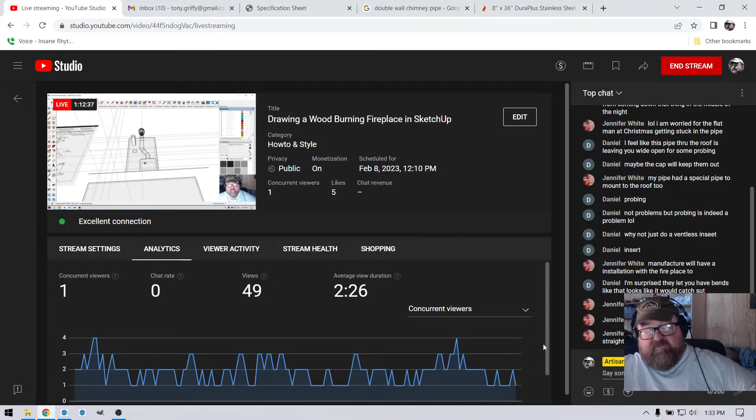Oh, you didn't hear the part straight up, because originally the reason we had this big 8-foot fireplace in the first place was we were going to have 2 chimneys. One was going to come up from downstairs beside it, and I was going to have 2 chimney pipes sticking out. Well, she decided to go with gas in the bottom part and add these wood boxes on the side. So now I wanted the pipe to come out in the middle. So I'm the one that, I didn't want the pipe to come out. Because the chimney is made 8 foot, so I thought it would look weird if the pipe didn't come out in the middle.